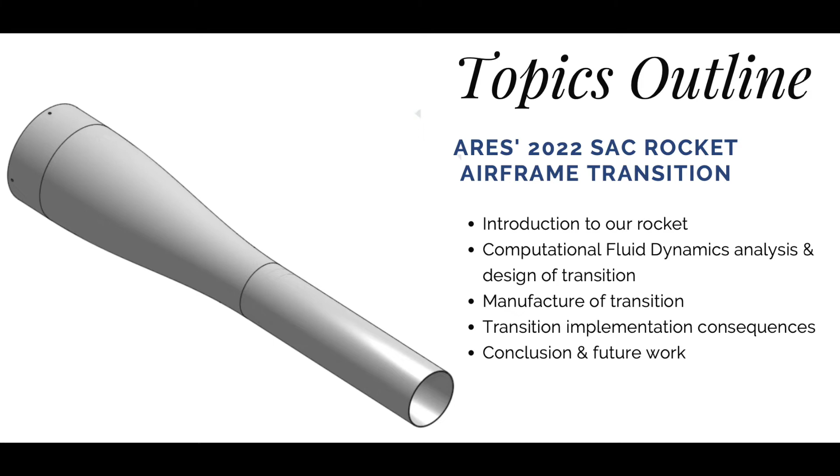A detailed explanation surrounding the manufacturing processes is going to be given to us by Kian. So that's along with any design considerations that we had to take into account as we came up with this novel kind of transition design. And at the end, we'll summarize all the main points and take any questions you may have. So I'll pass over to Harrison now for the next slide.

Great. Thanks, Peter. And I'm here to just give a high-level overview of the entire rocket. So it's essentially 9 feet, the 2700 mil, and the 90 mil and 160 mil external diameters are what the transitions formed to meet, with a laid-up fiberglass airframe, plywood bulkheads, and G10 for all the fins and launch lugs.

The motor is an L2 motor, which is maybe a bit unusual for the 10,000 feet challenge, but it's a 98% L motor. And we're running an SRAD flight computer just in parallel, but using Ravens, which will be elaborated on, and a functional scientific payload of 3U CubeSat form factor, which we're really set on and is the main design motivation for this rocket. And with that, I'll pass on to you.

Hi, my name is Ben. I'm the chief engineer, basically lead design for the project, and I'll run you through a little bit of our design considerations, why we made the choices we did. So first of all, as Harrison mentioned, our goal of making sure that we did adhere to the CubeSat format was the driving reason for why we selected the big bulbous fairing at the front.

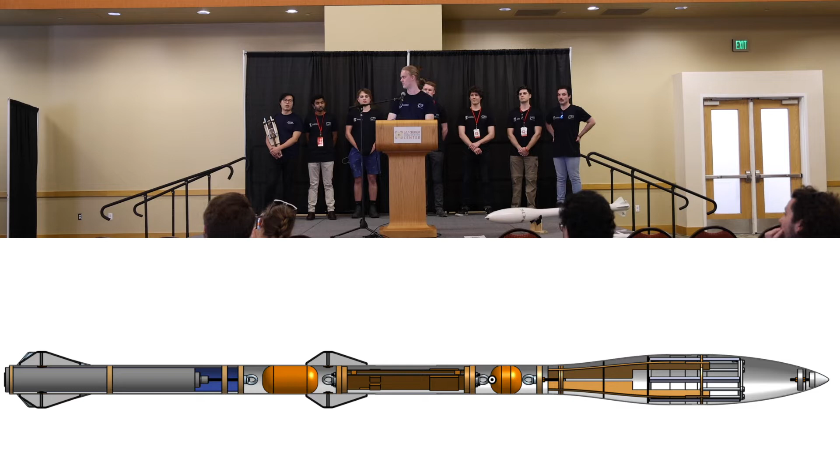And then having limited motor access in our country meant that we had to optimize the drag of our rocket so that we could still get to 10,000 feet on just a relatively underpowered L2 motor instead of an L3. So that's what led us to go from a 160 mil, roughly 6-inch diameter payload section down to a 90 mil, roughly 4-inch diameter main section. I will now just pass it over to our payload team to go a bit more in depth on that.

Hi everyone, my name is Rui and this is Neil, and we're from the payload team. So our payload is a mechanical model of the human neck segment of the spine, and the purpose is to investigate the effects of high G axial loading on the neck and what happens to it.

So the motivation behind it is, in high G flight, especially for fighter pilots, when you're experiencing sudden Gz direction acceleration, for example when you're pulling up or when you're ejecting from the seat, you're getting massive compression forces across the spine, and your cervical spine, your neck part, is the most mobile part of the spine. So when you're flopping around and you get that massive compression, it's quite likely to cause injury.

So with our model we aim to measure the forces between each segment of the spine and then essentially work out what the force loading pathway is, and work out what are the areas of the spine that are most susceptible to injury.

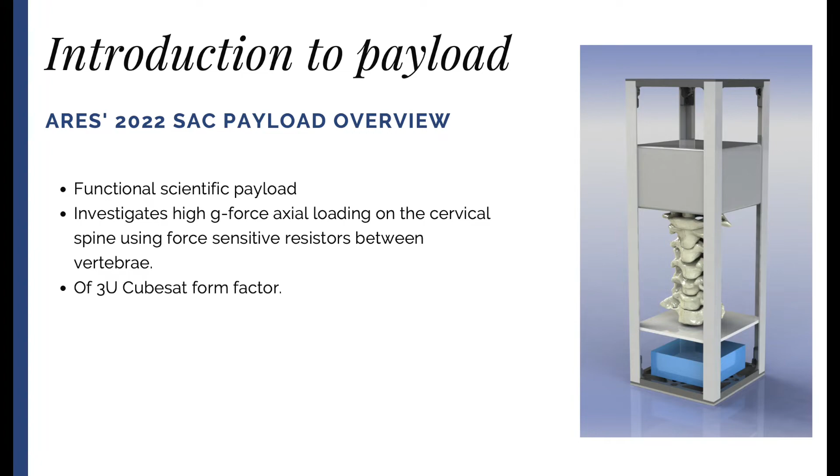G'day, my name's Josh. Apologies, first of all, I'm going to be saying words like millimeters and meters a lot, so if you've got allergies or anything like that, please protect yourself.

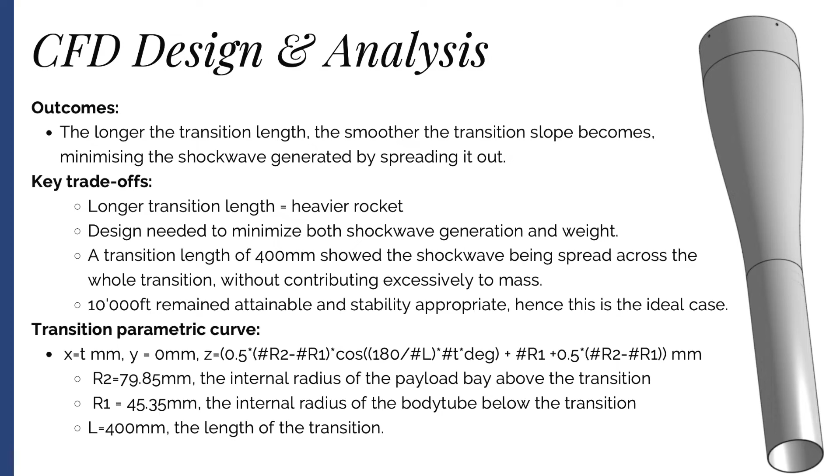So to fit Rui and Neil's payload into our rocket, we have to have a 160 diameter tube, but if we made our whole rocket 160 diameter, that increases the surface drag of our rocket too much. As we are restricted by our L2 motor, we had to find a solution, which ended up being this transition. The tricky thing about having a transition is that as flow moves around a step down, it accelerates, which means that even in transonic regimes, you can have localized regions of supersonic flow where shocks are induced, and in the wake of that, the drag increases significantly. And so your shiny, fantastic transition, which is going to lower the drag of your entire rocket, is suddenly increasing the drag of everything, and your great plan is ruined.

So to work that out, there are two ways essentially. We either use a wind tunnel or we use CFD. And as our uni was not that keen on giving us $1 million to build a new wind tunnel, we decided to use CFD. We tested with five different lengths of transition, because that's essentially the only thing we could change given our upper limit and our lower limit of tube.

As you can see here, the shock intensity is much greater for the 100 mil length than for the 400 mil length, and so by using that new method, we decreased the entire drag of our rocket by 38%, as opposed to just using the 160 the entire length. We also tested a 500 long, which is not shown here, but given the fact that it made very little difference, we decided to go with the 400 because increasing any longer than that would just increase the weight of our rocket. And as we're only using L2, we don't really have that kind of room to throw around.

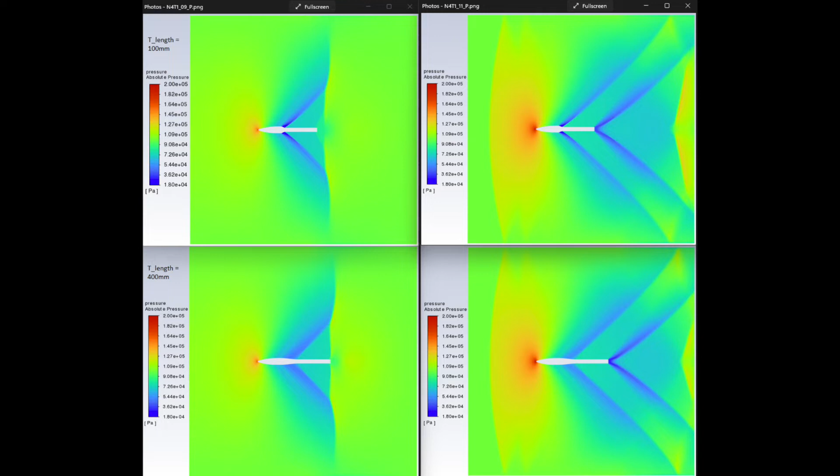Yeah, and this is just the pressure. And so, thank you very much. I'll hand over to Kian to talk you through how we made it.

So we use jelutong for the mold. It's a really great stable wood, great for pattern making and stuff like that. So at each end of the transition mandrel, we have a 50 millimeter insert, which inserts into the neighboring mandrels. So the way we actually turn this down, obviously this is a manual machine, so you don't have any CNC abilities. The way we did this is that we turned it down to a number of key diameters along the length of the transition, and then blended between those, and then just sanded. And we actually managed to get the transition to within about a millimeter of our laser cut profile.

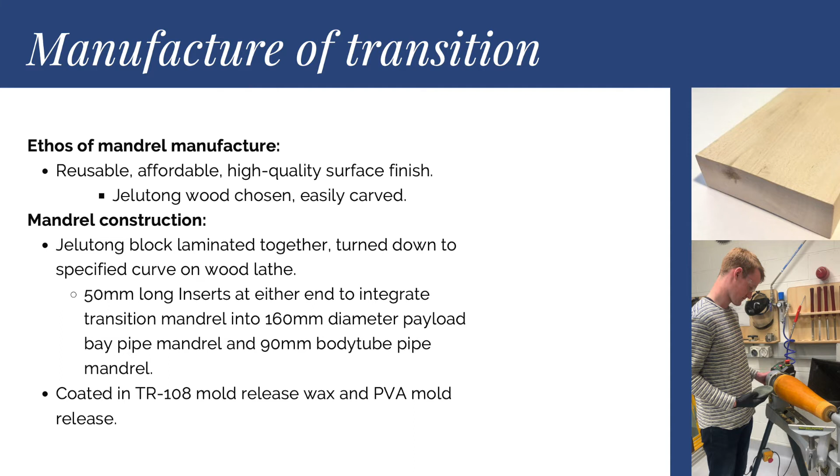So all of the airframe is constructed from 2x2 twill weave fiberglass, about 400 GSM. We went for a twill weave because it has better conforming abilities to compound curves, which obviously we have quite a few of on the rocket. So all of our booster sections and straight sections use a PVC mandrel. We went with PVC because it's super cheap and super available, and mostly straight. You can also, as we found out, chip it out of the fiberglass if it gets stuck, which it frequently does.

So the booster sections and straight sections are continuously rolled onto the mandrel, but this wasn't possible for the nose cone and transition section because of the compound curves. So what we did is we took half circumferences and then laminated them together, and then offset the next layer by 90 degrees, and then the other layer by another 90 degrees.

A big thank you to whoever put that terrible photo of me in the presentation there.

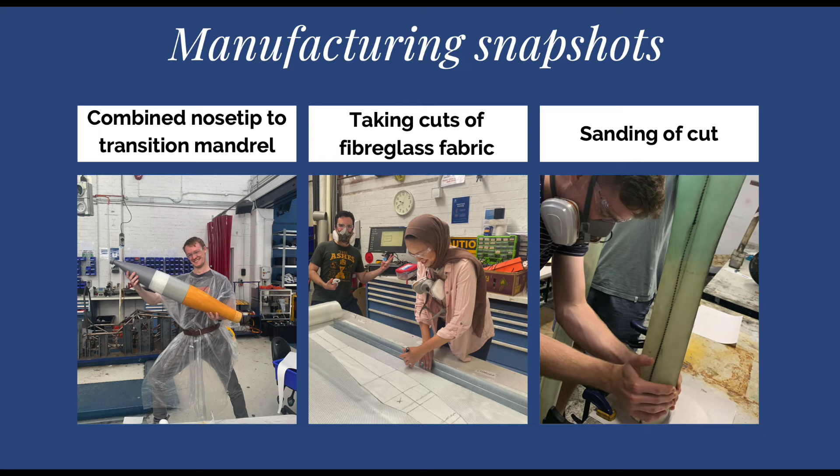So as you can see, we have our, as I mentioned, 3D printed nose cone up top, and then section of PVC, and then the lathe transition, and then there was another PVC pipe that slotted on the end there. So normally you wouldn't be able to actually extract these mandrels, but because we needed a separation point for the payload, we could actually cut all the way through our PVC pipe there at the top and remove the mandrels with a bit of force.

Then, once we have the raw fiberglass, you want the best surface finish possible. It's a big contributor to drag on an aerodynamic body like this. So what we did is we filled any low spots with a body filler that you'd use for repairing a car body. This was then sanded back. So for the transition and nose cone sections, they were actually short enough to fit on the lathe that you saw there. And so they were sanded back on that to get the most round possible. For the booster section, just hand sanded as best we could because it was too long.

Then after that, we sprayed with a high build automotive primer. So that fills in any little holes. And once you sand that back, you can see all the little pinholes that are left in the fiberglass. Then you can use a popsicle stick with some of the filler that we previously used, and you just dab it in and then just scrape off as much of the excess as you can, because it's a real pain to be sanding back loads and loads of filler.

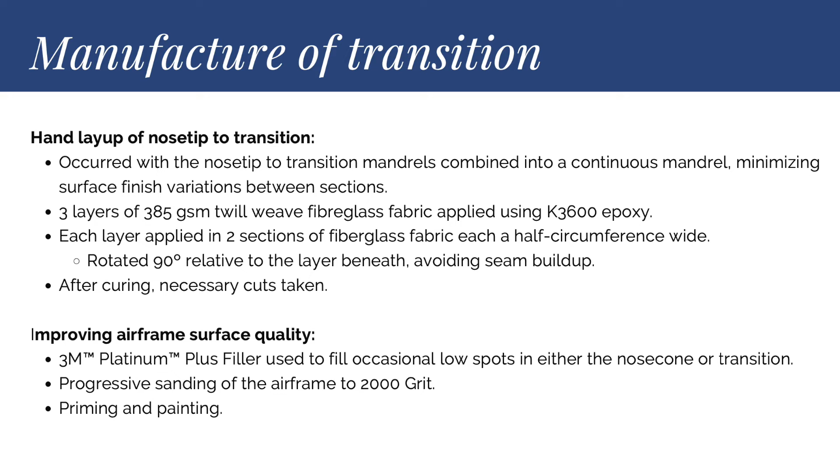Yeah, I'll pass over to Conrad. Thank you. So yeah, my name's Conrad. I'm the aerostructures lead for ARES.

These launch lugs were a very big pain for us to manufacture, and as you know, our decision to include a payload directly led us to needing the transition section, and then having the transition section meant we had to raise our launch lugs off to actually clear it on the rail. They're mounted in pairs to balance the aerodynamic forces, and they're mounted on the 90 millimeter diameter section of our rocket.

They needed to be tall enough to clear the payload on the rail, as already said, and that meant we needed to finalize a design that was not only strong enough to bear the weight of the rocket, which is about 10 kilos, but it needed to minimize drag. We found from some early CFD results that having these launch lugs versus the null case of having just a smooth, normal body was an increase of drag of about 30%. So these needed to be strong and they needed to be aerodynamically profiled really well.

So the design we ended up using was a structural M8 bolt through the middle of it. Very crude, but it does a very good job. Can bear the full weight of the rocket. That is bolted to the inside of our body tube. It has a backing plate, and then that was fully epoxied over, so it's a permanent joint.

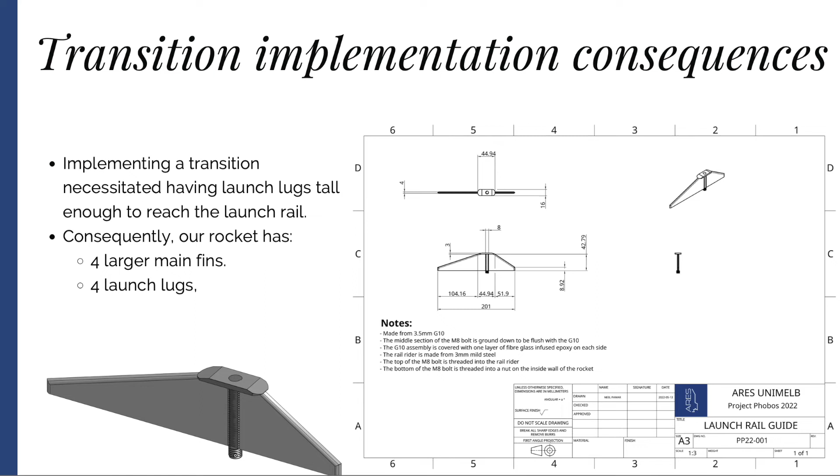So to conclude, we have achieved our two goals that we had initially, those being having a payload and using an L2 motor that we were restricted to by having an L2 flyer, by optimizing the design of the transition so that we can have the lowest weight and drag, and avoiding these areas of very high intensity shockwaves around the transition that Josh talked about a bit just before.

The second goal that we achieved was that, according to our simulations anyway, we will be reaching our target apogee of about 10,000 feet. So obviously that's crucial for the objectives of the competition. Additionally, we've met the two requirements of needing standoff launch lugs, as Conrad just mentioned. Obviously, having the transition be bulkier than the rest of the body, we need standoff launch lugs to be able to fit into the rail. So that was done by the methodology outlined by Conrad.

And obviously the second design requirement that we met was having a transition to house the payload, which is what Neil and Rui described, which is going to be the medical payload, measuring the compression of the cervical spine.

And just a small point there, follow-on work is that we're looking into creating reusable outer molds so that we don't have to, like Kian explained, have the 3D printed molds and destroy them to then take out the fiberglass. So that's something we're looking into to be able to use them continuously for other rockets into the future, and save materials and save time as well.

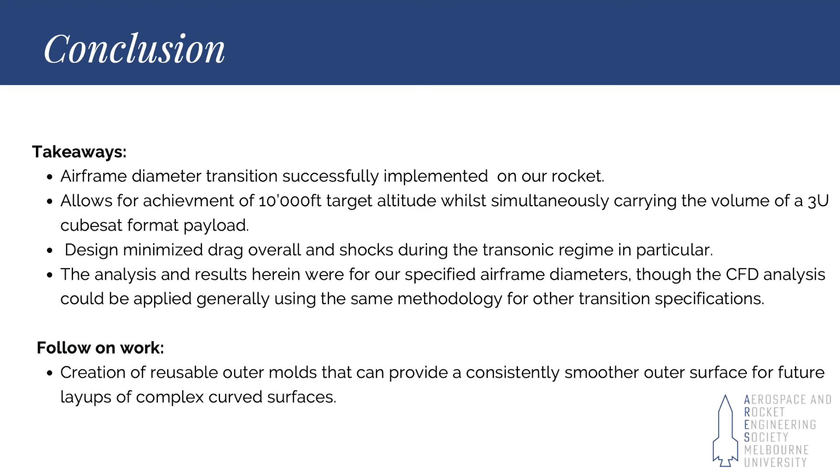So yeah, questions, people feel free to come up to the front, have a closer look. I think I saw someone laughing about how they had similar problems with launch lugs maybe. Yeah?

Honestly. Imperial units. Who invented that?

Significant increase in drag through your launch lugs? Alternative concept designs that can produce lower drag? Very good question. So the question was, with the design of our launch lugs, how much does that contribute to our drag? And were there any other designs that could have reduced that? So I believe it was around about 30%.

Thank you, CFD people. I think around 30% of our drag is actually being generated by those sort of sticking out launch lugs there. So definitely a major factor from such a seemingly minor component. In terms of design, the driving factor this time was manufacturability. That was our main hurdle we had to overcome.

There's definitely better designs that we can do. That is not something that was in the scope this year, but that will definitely be further work in our CFD sort of design and analysis.